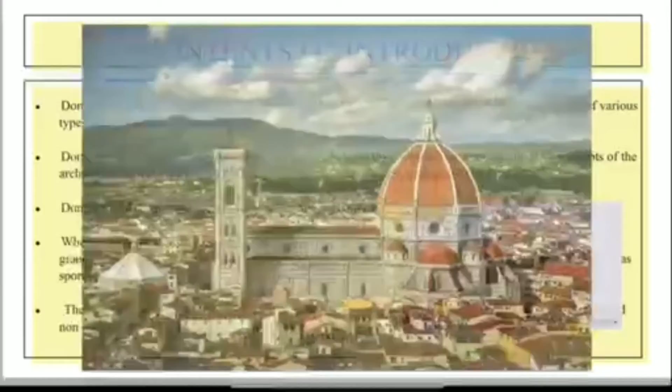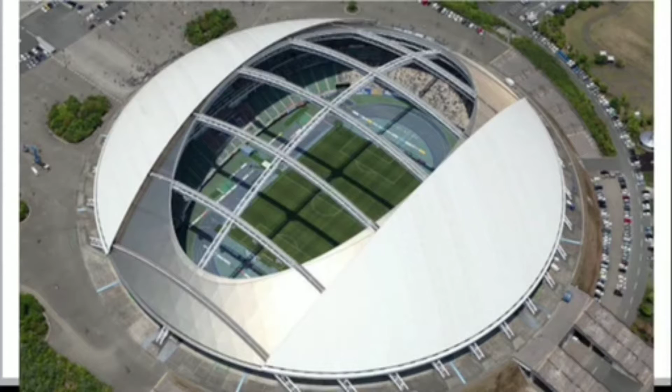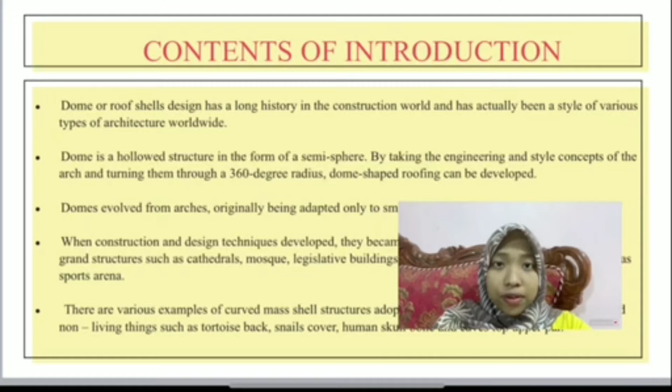Third, dome evolved from arch, originally being adapted only to small buildings such as huts and tombs. When construction and design techniques developed, they became more popular as a means of showcasing grand structures such as cathedrals, mosque, legislative buildings, and more recently leisure buildings such as sport arenas. There are various examples of curved mass shell structure adopted by nature in various forms of living and non-living things such as tortoise back, snail's cover, human skull, bone, and cave top upper part.

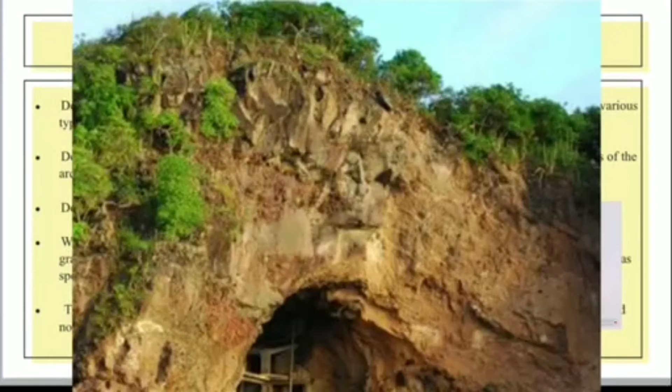Assalamualaikum. My name is Nur Kamarina Miza binti Nur Azman. My matric card number is CF 2092. I will present about background study for shell roof.

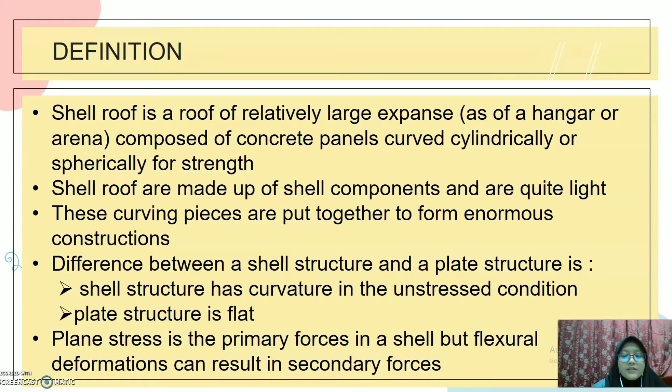So, definition. Shell roof is a roof of relatively large expanse, as of a hangar or arena, composed of concrete panels curved cylindrically or spherically for strength. Shell roofs are made up of shell components and are quite light. These curving pieces are put together to form enormous constructions. The difference between a shell structure and a plate structure is that a shell structure has curvature in the unstressed condition, meanwhile a plate structure is flat. Plane stress is the primary force in a shell, but flexural deformations can result in secondary forces.

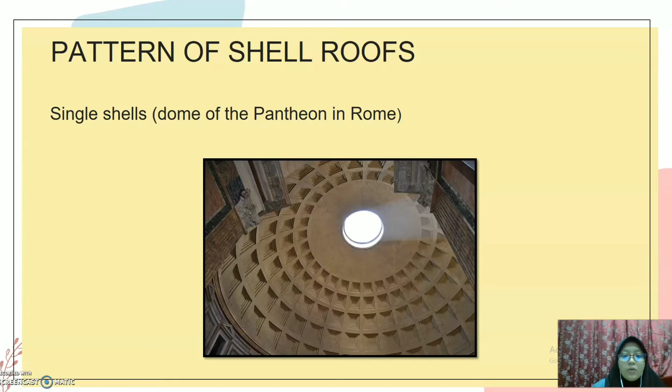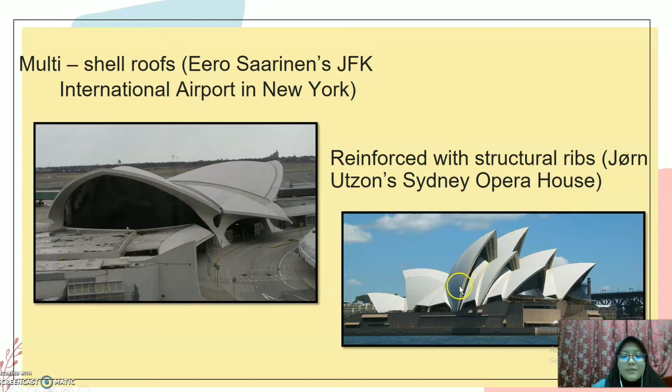These are a few patterns of shell roofs. First one is single shells, dome of the Pantheon in Rome. Second one is multi-shell roofs, Eero Saarinen, John F. Kennedy International Airport in New York. Third one is reinforced with structural ribs, Jørn Utzon, Sydney Opera House. This one is the most famous building in Sydney, Australia. Most people know this building. And the last one is latest structures, Norman Foster's Great Court at the British Museum in London.

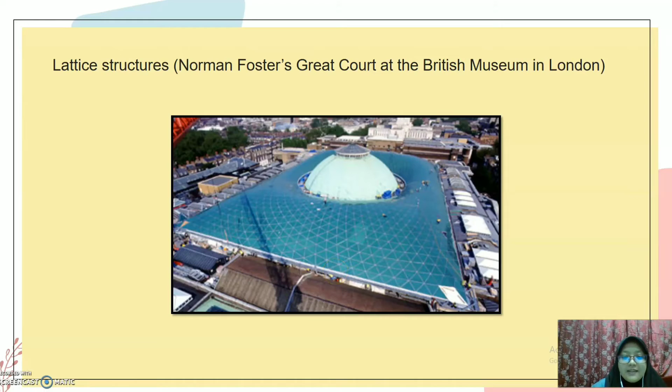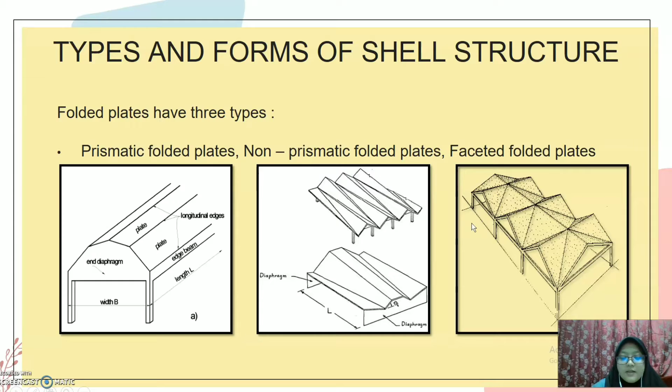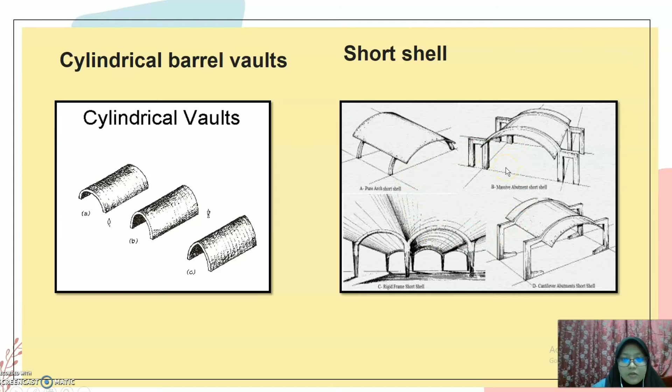Assalamualaikum warahmatullahi wabarakatuh. My name is Aiman bin Zambi. My matric number is CF 2093. So I'm going to continue this slide presentation with alternative method. Alright, so move to the next slide.

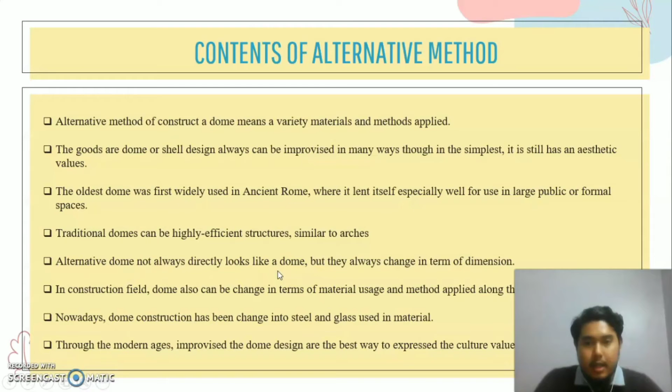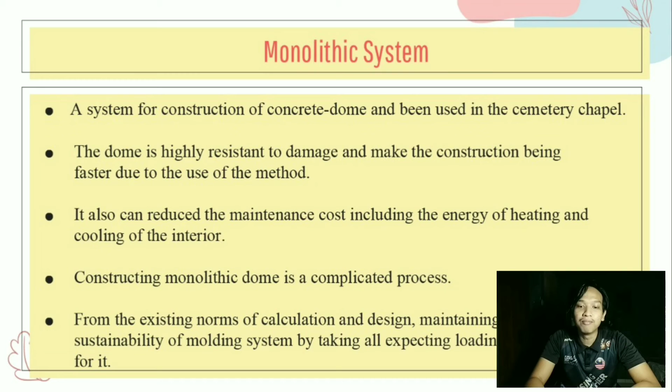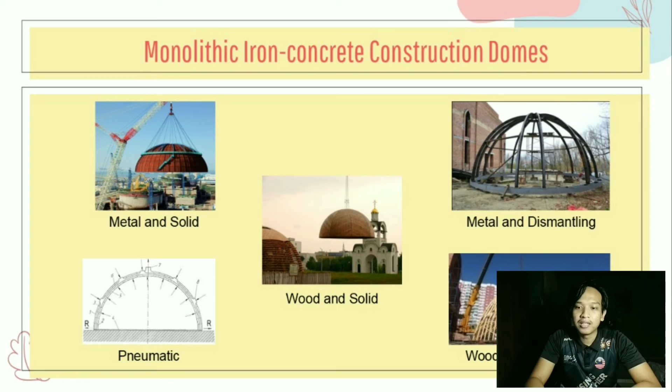We go to the next slide. Monolithic iron concrete construction domes. So this is the example of the monolithic iron concrete construction domes. We can see metal and solid, pneumatic, wood and solid, metal and dismantling, wood and dismantling.

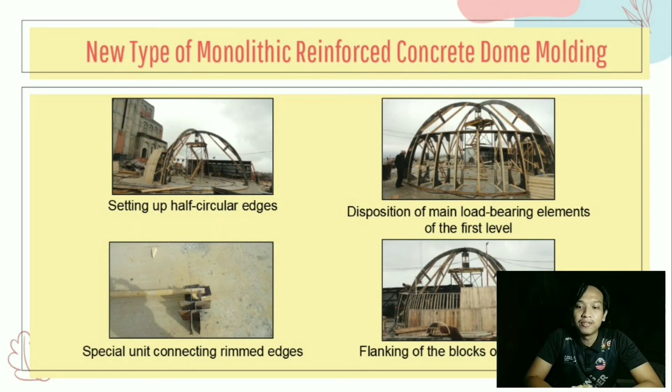We go to the next slide. New type of monolithic reinforced concrete dome molding. There are a few stages for the monolithic reinforced concrete dome molding. For example, setting up half circular edges, special unit connecting rimmed edges, disposition of main load bearing elements of the first level, flanking of the blocks of the first level, and then constructing the first level of the dome, disposing elements of the third level, and then lastly dome concreting.

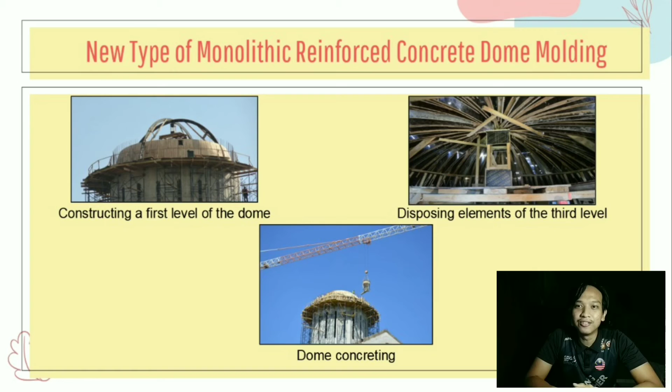Domes have been constructed over the centuries from mud, snow, stone, wood, brick, concrete, metal, glass, and plastic. The domes of the modern world can be found over religious buildings, legislative chambers, stadiums, and a variety of functional structures. The advantage of the concrete shell is the curved shape, often used for concrete shells.